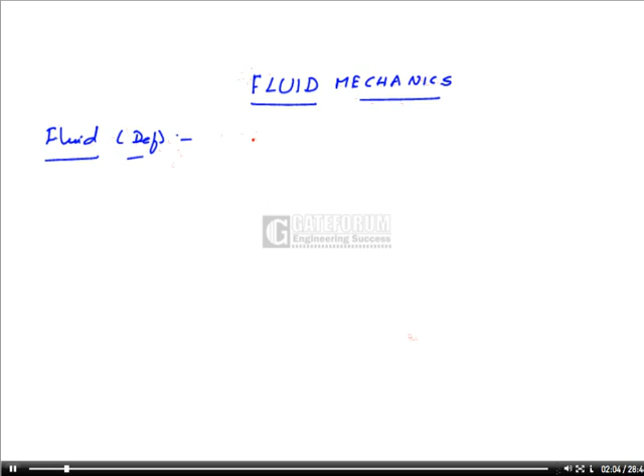A fluid is a substance that deforms continuously when subjected to even an infinitesimal shear stress.

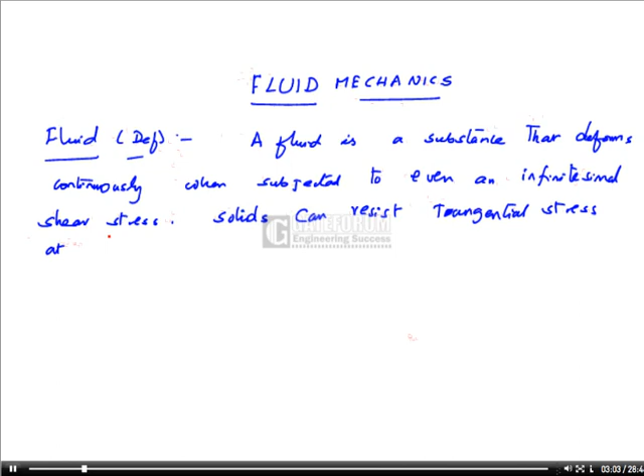Whereas solids can resist tangential stress or shear stress at static conditions, undergoing a definite deformation. While a fluid can do it only at dynamic conditions, undergoing a continuous deformation as long as the shear stress is applied.

So the broad distinguishing of fluid and solid can be given like this: a fluid deforms continuously even under the action of the slightest shear stress or tangential stress. In future, we are going to call these shear stresses as viscous stresses. In solids, the molecules are very closely packed. In fluids, there is relative motion inside the fluid between the molecules. That is also how we can distinguish between a solid and a fluid.

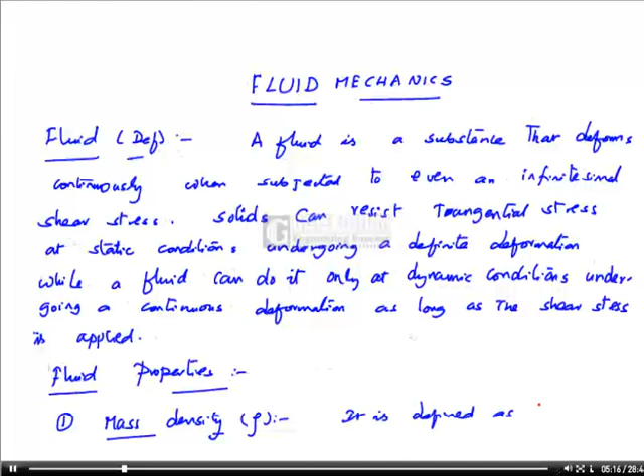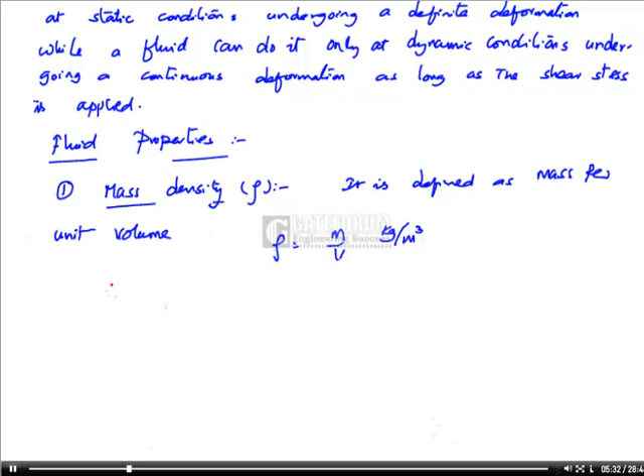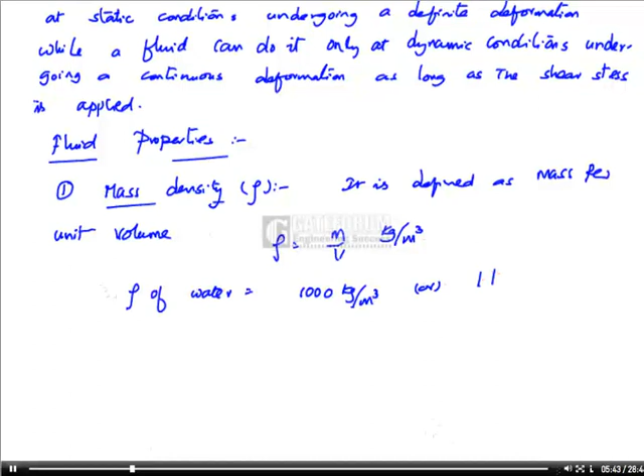Now I shall highlight the important properties of fluids - fluid properties. The first property is mass density, designated as rho. It is defined as mass per unit volume. Rho is m divided by v. Units are kg per meter cube. For example, rho of water is 1000 kg per meter cube, or 1 kg per liter, or 1 gram per milliliter or cc.

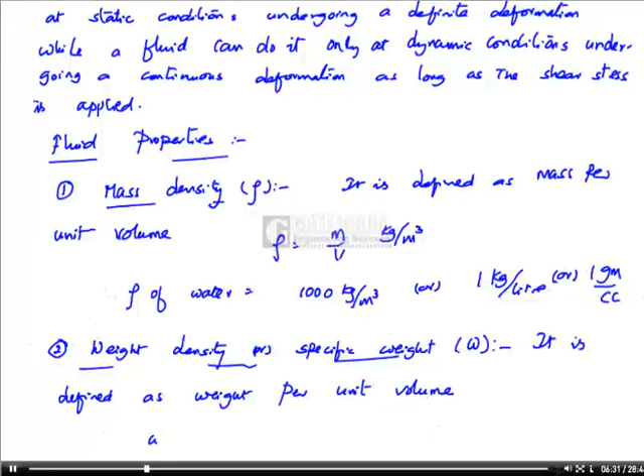Second definition, an important one, is weight density, also known as specific weight, denoted as small w. It is defined as weight per unit volume. W is weight by volume of the liquid. It can be written as mass into acceleration due to gravity divided by volume. Mass by volume we have just defined as rho, so W is rho into g. Specific weight is mass density into acceleration due to gravity g. Units of W will be, since it is force by volume and weight is nothing but force, Newton per meter cube.

For example, W of water is 9.81 kilonewton per meter cube.

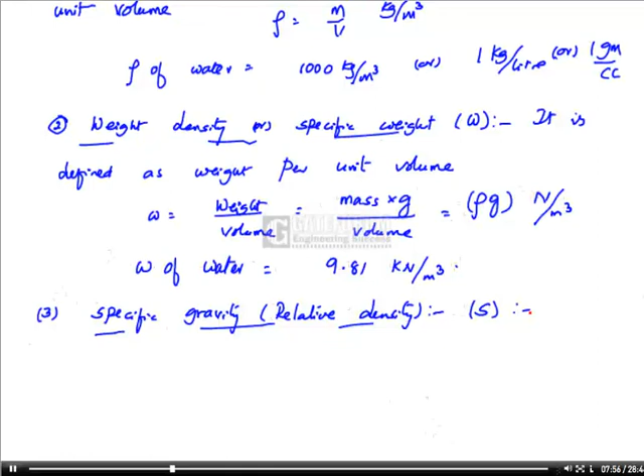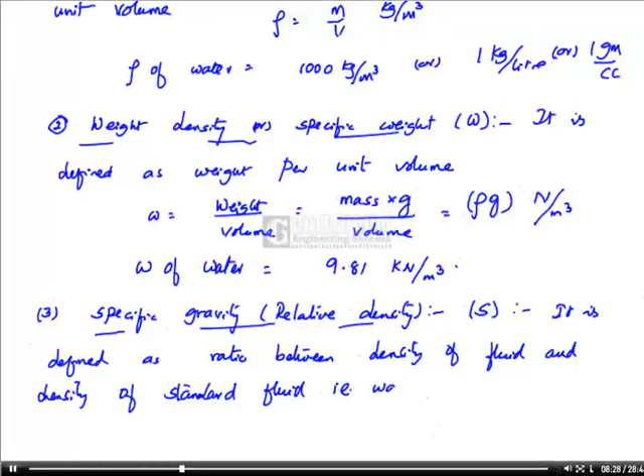Third definition is specific gravity, also known as relative density RD, designated as S. This is a property of the fluid which compares the density of the fluid with the density of the standard fluid, that is water. So I can define it as the ratio between density of the fluid and density of the standard fluid, water. S is equal to rho of the fluid divided by rho of water.

For example, S of mercury is 13.6. It means density of mercury is 13.6 into 1000 kg per meter cube. Mercury is one of the heaviest fluids we can talk about in fluid mechanics - its density is 13.6 times that of water.

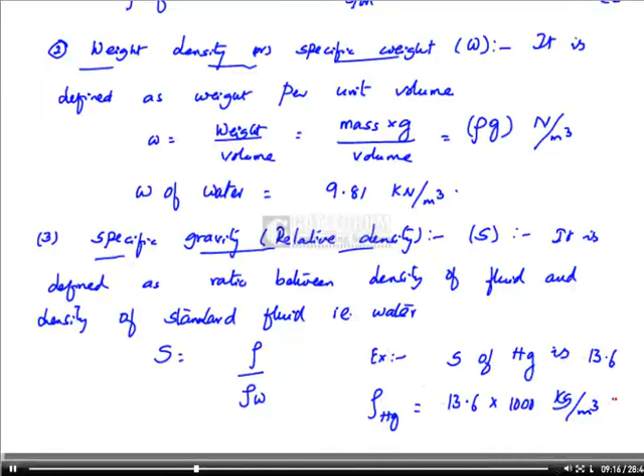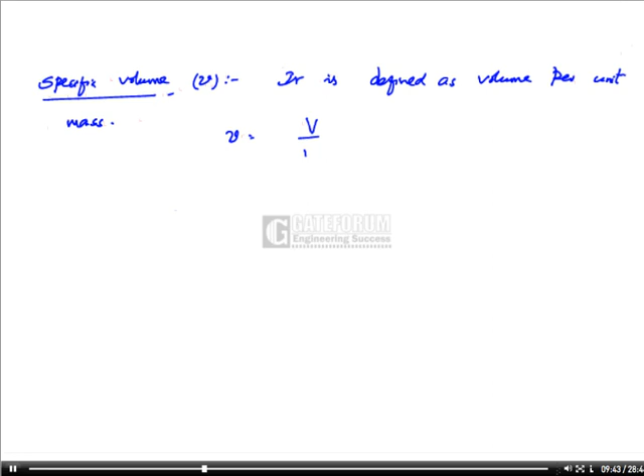Next property is specific volume, small v. It is an important property in thermodynamics also. It is defined as volume per unit mass. Small v is v by m, that is the reciprocal of density, meter cube per kg. Specific volume of water is obviously 0.001 meter cube per kg.

Next property is viscosity, mu, also known as dynamic viscosity. Though viscosity is a fluid property, the effect of this property is very well understood when the fluid is in motion.

In the flow of fluids, fluid elements move with different velocities. Each element of the fluid finds some resistance due to fluid friction within the elements. So we can identify shear stress between the fluid layers moving with different velocities. In fact, Newton is the man who put up a relationship between this shear stress, or tangential stress, or viscous stress, and the velocity flow field.

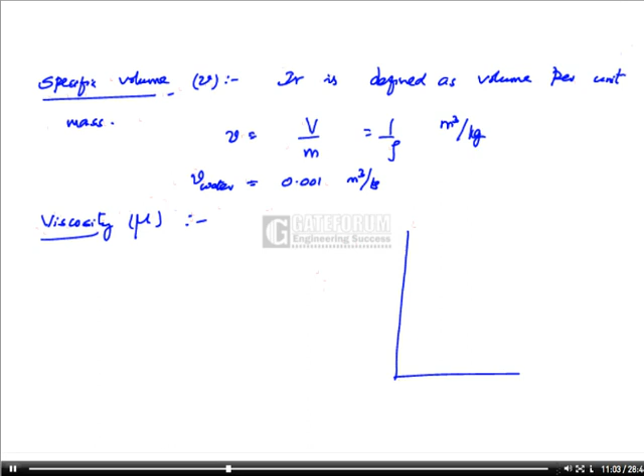If you look at fluid layers having different velocities, now if u is the velocity of the fluid layer, it is a function of y. Fluid particles are moving in the same direction. Fluid layers are moving in the same direction, but with different velocities. If you take fluid layers at different heights, we find tangential or viscous stresses between them.

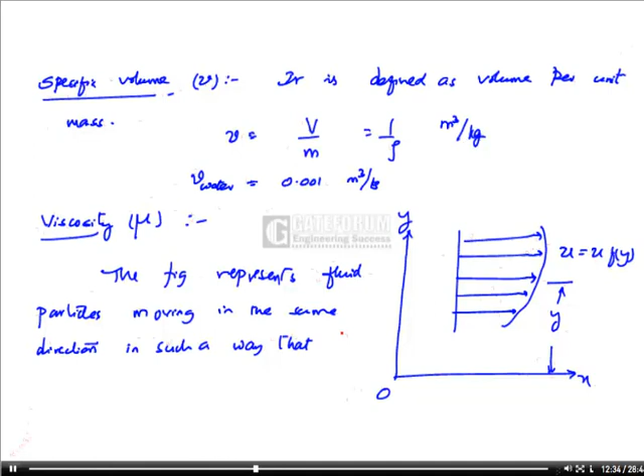Now the figure represents the fluid particles moving in the same direction, in such a way that the fluid layers move parallel with different velocities.

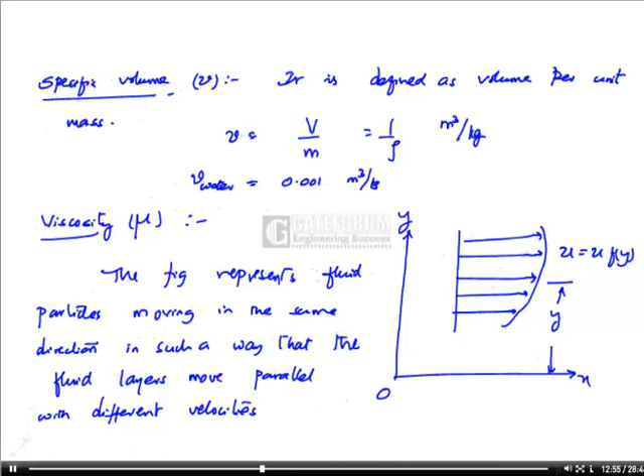Now, for example, if we take two fluid layers, if this is y, I consider two different adjacent layers of the fluid at a distance y measured from the reference axis. The upper layer, which is moving faster, tries to draw the lower, slowly moving layer along with it by means of a force F. Whereas the bottom layer would exert exactly the same force but in the opposite direction on the top layer.

According to Newton's third law, for every action there is an equal and opposite reaction. Thus, the dragging effect of one layer on the other is experienced by a tangential force F on the respective layers. If F acts over an area of contact A, then the shear stress tau is defined as F by A.

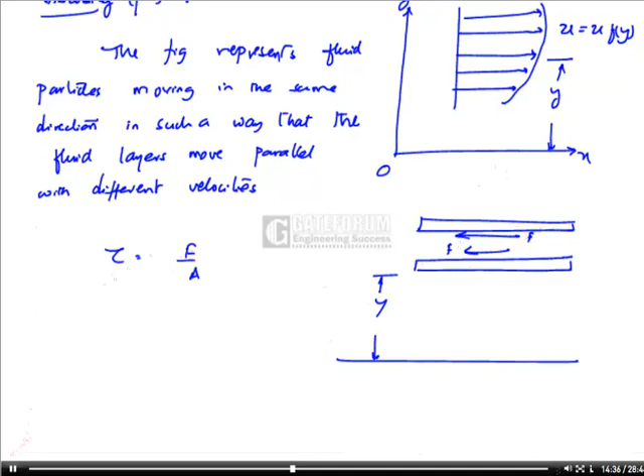Newton said that this shear stress tau is proportional to the quantity delta U by delta Y, where delta Y is the distance of separation of the two layers and delta U is the difference in their velocities. In the limiting case, as delta Y tends to 0, delta U by delta Y equals du by dy, which is also known as the velocity gradient at a point in a direction perpendicular to the direction of motion of the layer.

Tau is directly proportional to du by dy. Shear stress is directly proportional to the velocity gradient.

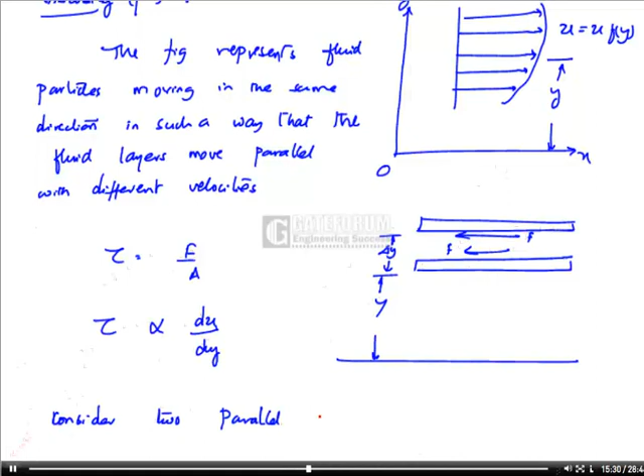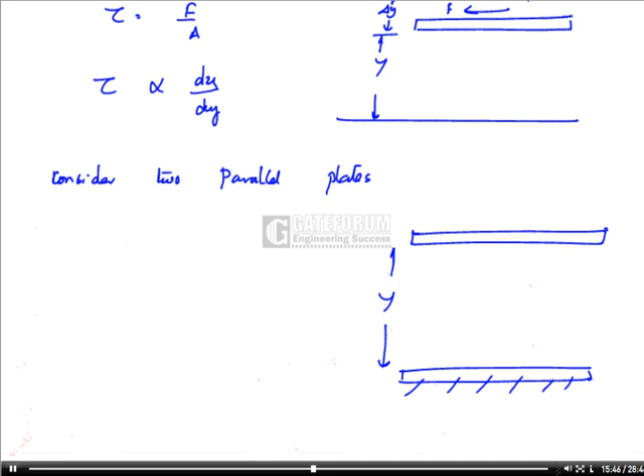Now I shall explain this viscosity in a slightly different fashion. Consider two parallel plates shown in the figure, top plate and bottom plate. The gap between them, let it be y. The bottom plate is fixed, for example. The gap between the plates is y, and this gap is filled with a fluid.

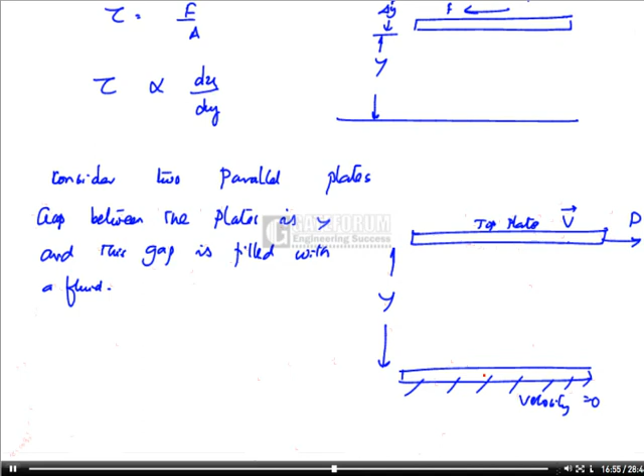I suppose I exert a force of capital P on the top plate, and the top plate is moving with a constant velocity v. There is one layer of fluid attached to the top plate, and hence this layer moves with the same velocity as the top plate, that is velocity v, because that layer cannot slip over the top plate. Similarly, there is another fluid layer attached to the bottom plate. Because the bottom plate is fixed to the ground, its velocity is 0, so that fluid layer also has 0 velocity. The top layer has velocity v, and the bottommost layer has velocity 0.

But different layers at different heights will have different velocities. The length of the arrow indicates the velocity of the fluid layer at any particular height y. So I suppose u is the velocity of the fluid layer at height y, and this gap is, I suppose, dy.

Now the viscosity could be understood like this. There is tangential shear stress, or viscous shear stress, between the fluid layers because of the dragging effect. One layer tries to drag the adjacent layer. So viscosity is the property of the fluid by virtue of which there is a resistance offered by one layer of the fluid over the adjacent layer against the relative motion between them. As we have seen in the figure, there is relative velocity prevailing between the layers, since different fluid layers at different heights have different velocities.

Bottommost layer has got 0 velocity, topmost layer has got the velocity v. So the velocity is varying maybe linearly or parabolically or whatever may be the function. The velocity is changing at different heights. Different layers at different heights have got different velocities.

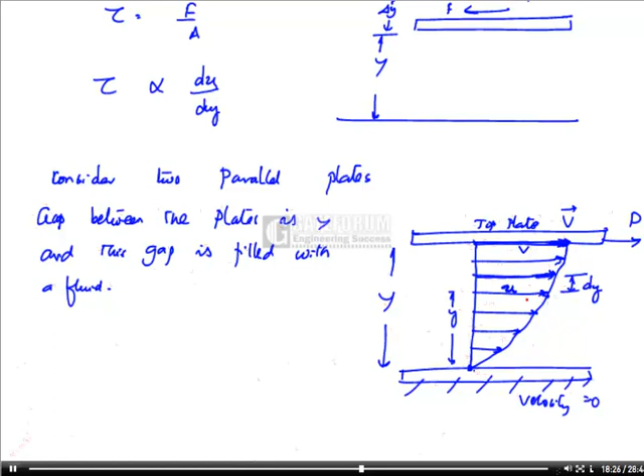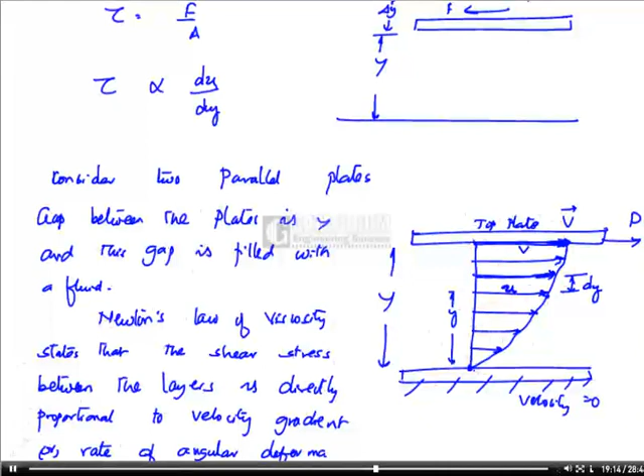So Newton's law of viscosity states that the shear stress between the layers is directly proportional to velocity gradient, or rate of angular deformation, or rate of shear strain. This is Newton's law of viscosity.

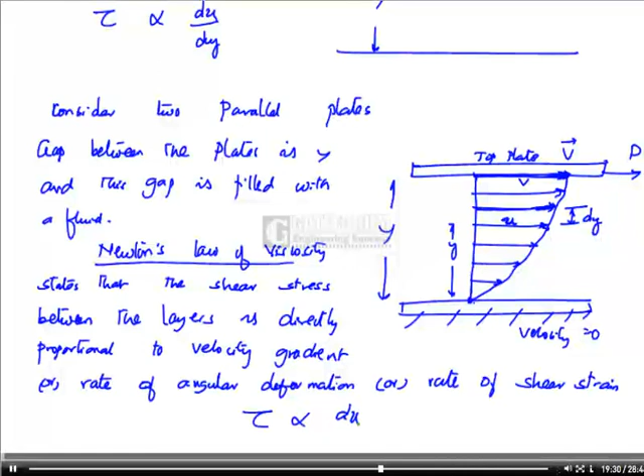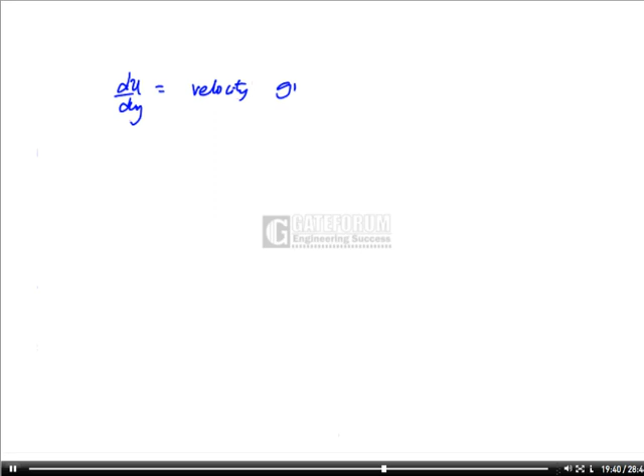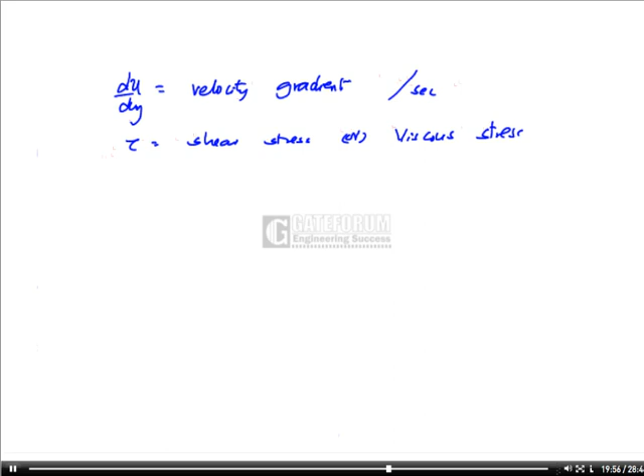Tau is directly proportional to du by dy. Here du by dy is called velocity gradient, having units of per second, and tau is shear stress, or viscous stress, or tangential stress between the layers, having the units of Newton per meter square.

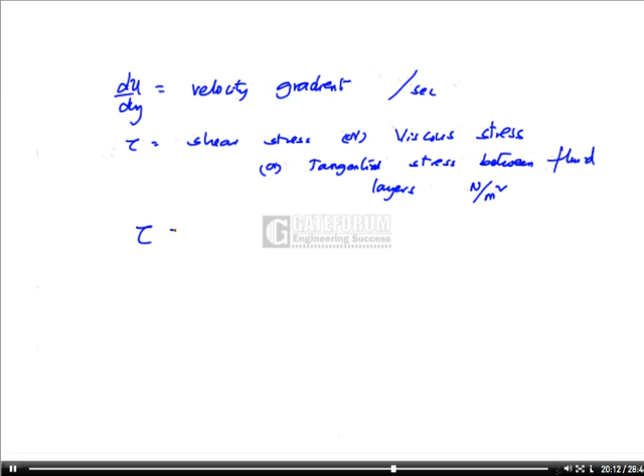The proportionality constant is given by mu, a very important property of the fluid. Mu is known as dynamic viscosity of fluid. What are the units of mu? Newton second per meter square, also known as Pascal second. The dimensional formula for mu is M L power minus 1 T power minus 1.

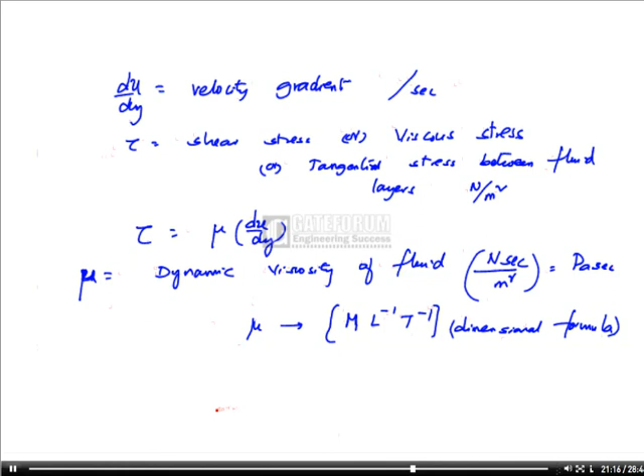So viscosity or viscous force is a non-conservative force, just like frictional force in applied mechanics. Any work done against this non-conservative force gets automatically converted into heat energy. According to thermodynamic laws, the work done against the viscous force gets transformed into heat energy.

So viscosity is a very important property of the fluid, by virtue of which there is a resistance offered by one layer over another layer against the relative motion.

The fluids that obey Newton's law of viscosity are known as Newtonian fluids. Fluids like water, air, mercury obey Newton's law of viscosity and are known as Newtonian fluids.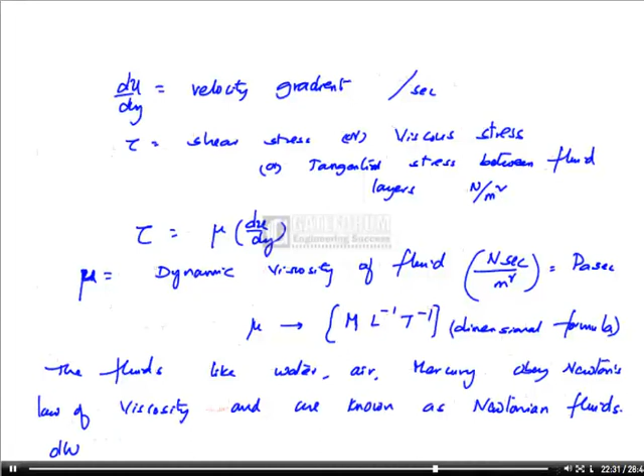Other fluids like paints, different polymer solutions, blood, do not obey the typical linear relationship of tau and du by dy, and are known as non-Newtonian fluids.

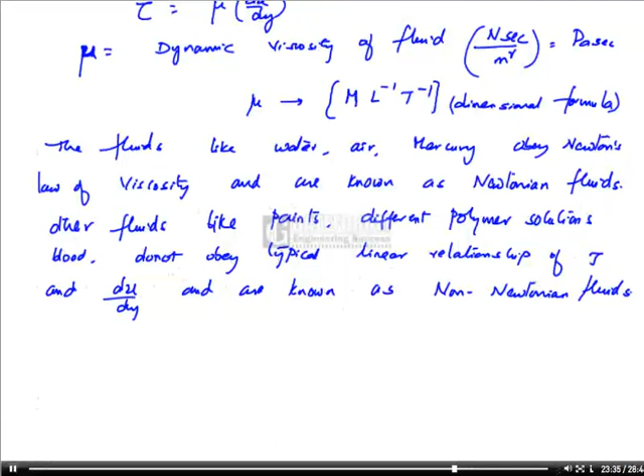Causes of viscosity. If you look at what are the reasons for viscosity, number one, intermolecular force of cohesion. Particularly in the liquids, this plays a very predominant role.

And number two, molecular momentum transfer or exchange. In fact, in gases, where the molecules are placed spatially with a great distance between the molecules as compared to liquids, the molecular momentum exchange plays a vital role in deciding the viscosity.

Due to strong cohesive forces between the molecules, any layer in a moving fluid tries to drag the adjacent layer to move with an equal speed. Thus produces the effect of viscosity, as we have seen earlier.

Particularly in liquids, the intermolecular forces play a very important role. Whereas in gases, the molecular momentum transfer during the collisions between the gaseous molecules plays a role in deciding the viscosity.

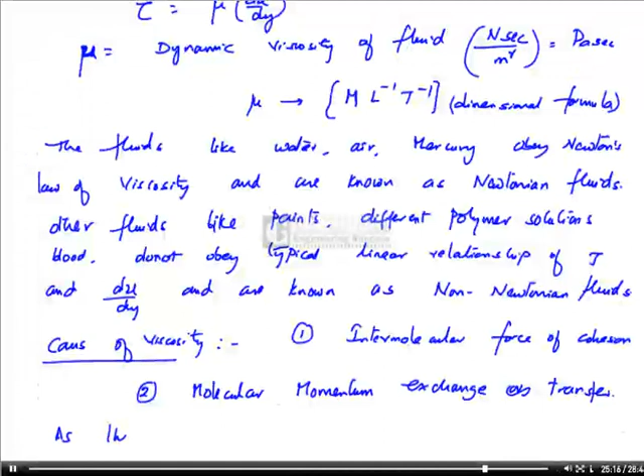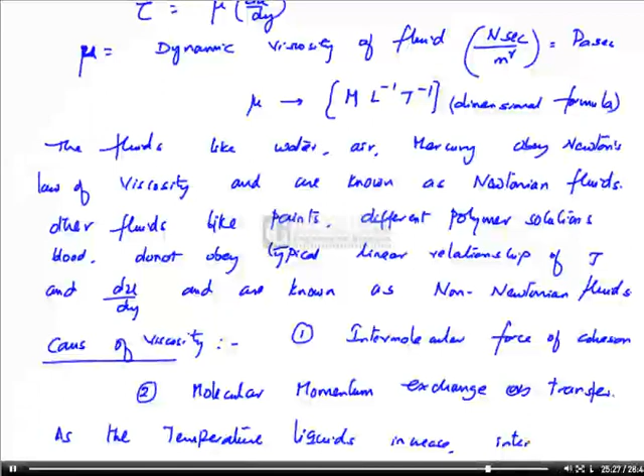But as the temperature of liquids increases, intermolecular forces of cohesion decrease, hence viscosity of liquids decrease.

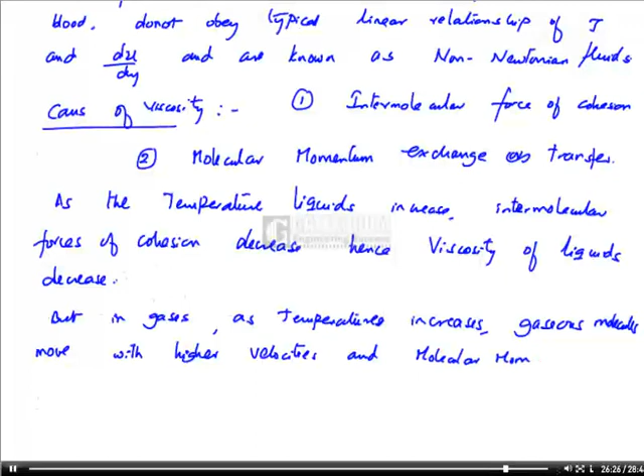But in gases, as temperature increases, gaseous molecules move with higher velocities, hence molecular momentum transfer between layers increases, hence viscosity of gases increase.

So the mechanism of viscosity is different in liquids and in gases. In liquids it is due to intermolecular force of cohesion mainly, whereas in gases the viscosity is mainly due to the molecular momentum exchange or transfer.

According to the kinetic theory, gas molecules will move with greater velocities at higher temperatures. I can expect more collisions between the layers per unit time, hence the viscosity increases in gases, whereas in liquids viscosity decreases with increase in temperature. This is an important point.

In both liquids and gases, the viscosity is independent of pressure. Pressure will not play any role. Here only the temperature plays a role.

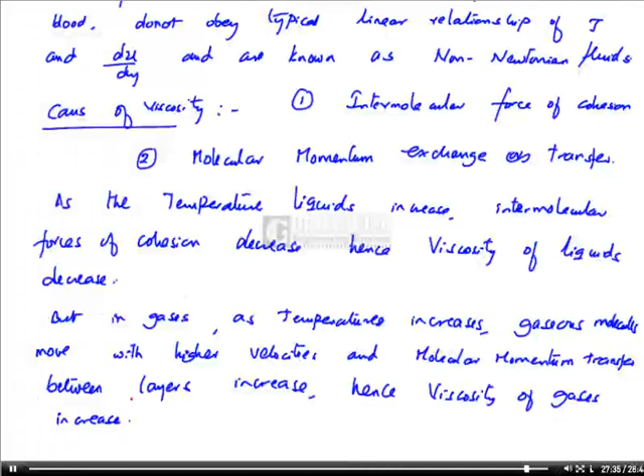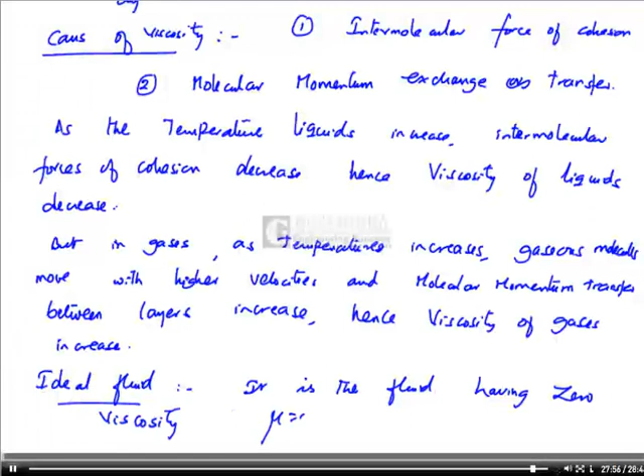Now I define ideal fluid. It is the fluid having zero viscosity. Mu is 0 for ideal fluid. In fact, all the real fluids, in reality, will have a viscosity greater than 0. So there is no fluid having 0 viscosity. So ideal fluid is only an imagination or hypothetical fluid having 0 viscosity.

But in future, while writing equations like Euler's equation of motion, Bernoulli's equation of motion, etc., the ideal fluid concept plays a very vital role. Making the mu value 0, that is assuming the fluid as ideal, is a very important concept in developing equations, particularly in irrotational flow, etc.